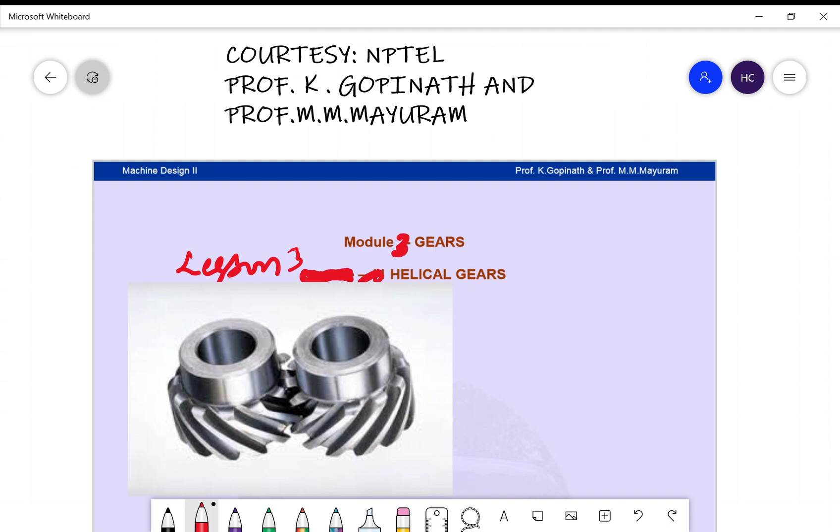Here we have an image of helical gears. Helical gears are used to transmit heavy power at high speeds with low noise.

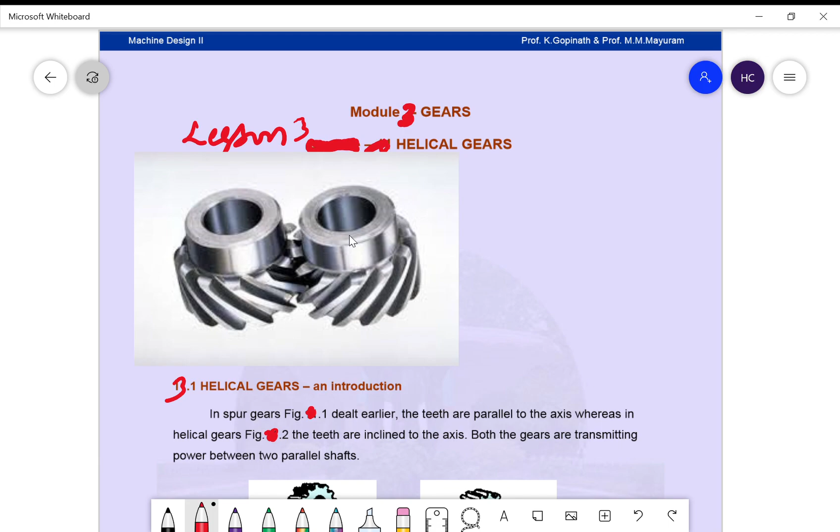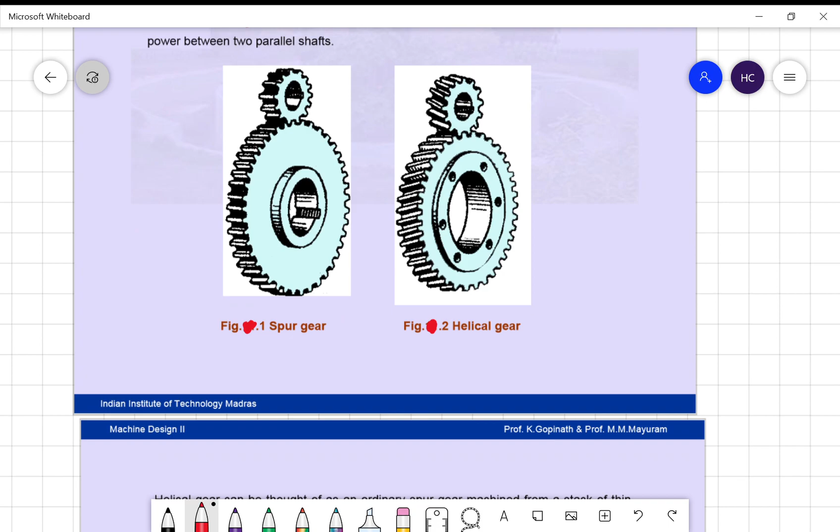Introduction. Here we have figure 1 and figure 2: figure 1 spur gears and figure 2 helical gears. We have already studied that in the case of spur gears, the teeth are parallel to the axis and also parallel to each other. Whereas in the case of helical gears, shown in figure 2, the teeth are inclined to the axis. That's the main difference between spur gears and helical gears.

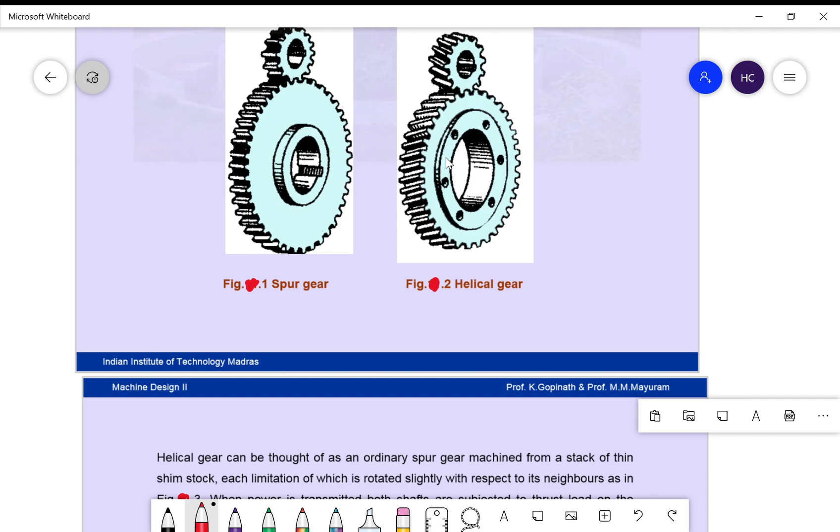Actually, a helical gear is a form of spur gear, but the teeth are inclined to the axis. A helical gear can be thought of as an ordinary spur gear machined from a stack of thin shim stock. Rotated spur gear laminations approach a helical gear as the laminations approach zero thickness.

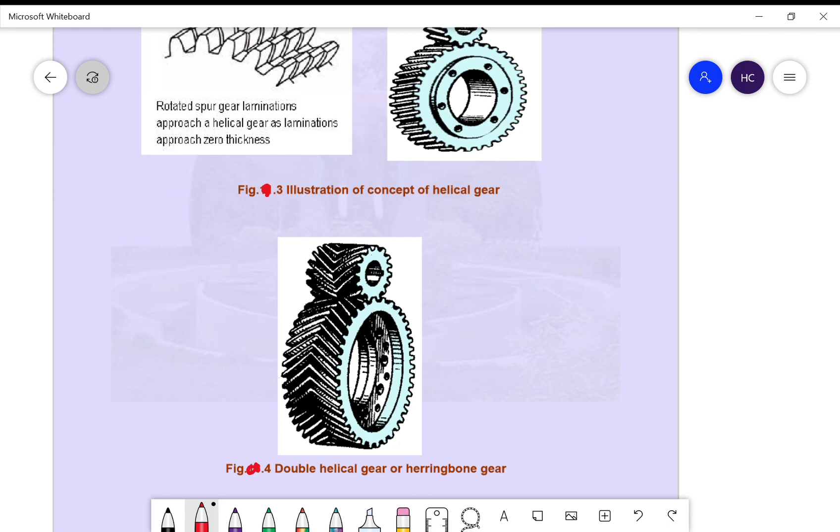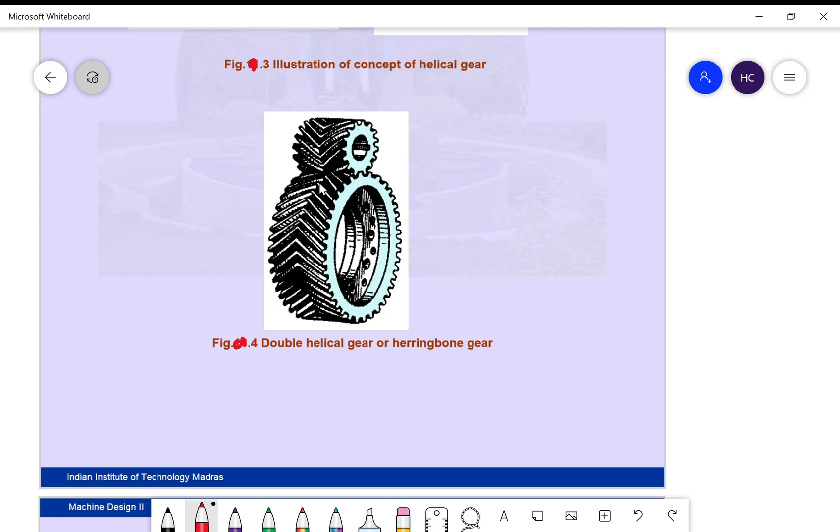Figure 4 illustrates a double helical gear, or herringbone gear. The herringbone or double helical gear, shown in figure 4 and also figure 5, can be two helical gears with opposing helix angle stacked together. As a result, two opposing thrust loads cancel and the shafts are not acted upon by any thrust load.

The advantage of elimination of thrust load in herringbone gears is heavy power transmission. But these double helical gears or herringbone gears cost high because machining cost and mounting costs are also high. Hence, application is limited to only very heavy power transmission.

Professor V.B. Bhandari distinguished herringbone and double helical gear. In the case of a herringbone gear, the teeth are cut on a single blank, whereas in the case of double helical gears, there will be a groove between these two gears. This groove separates the two gears in the case of double helical gear. But most engineers say that double helical gear is a herringbone gear.

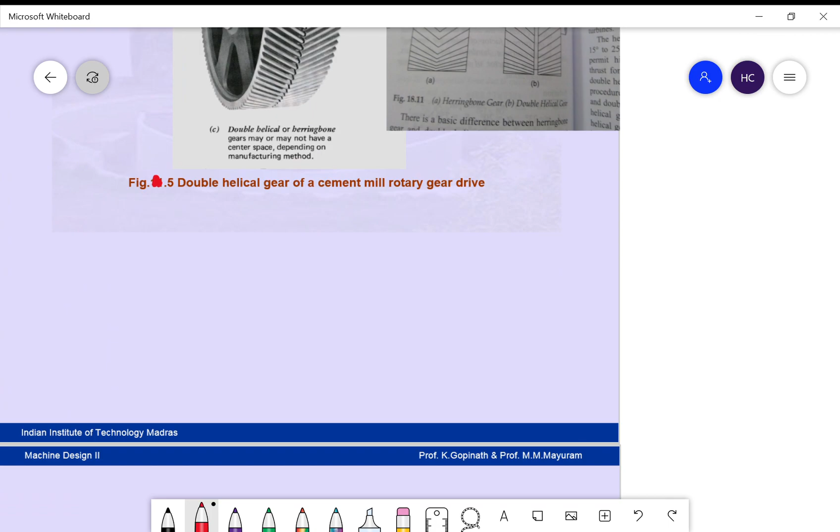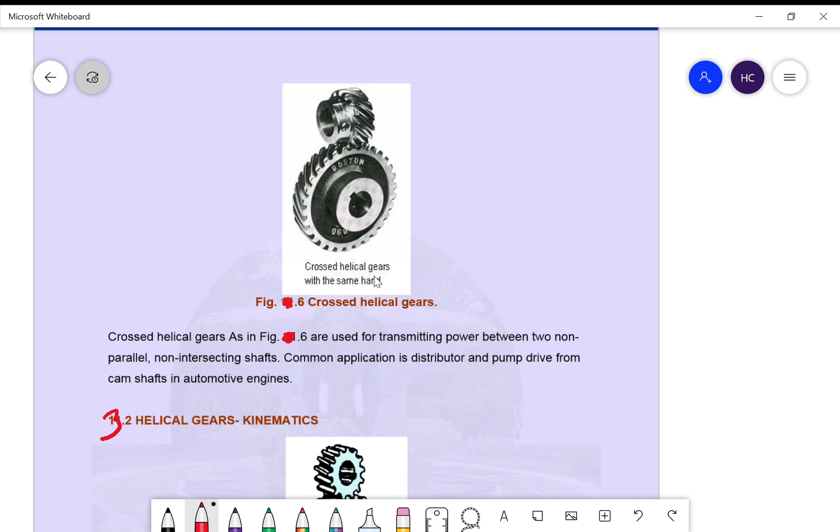Another class of helical gears is the crossed helical gear, shown here. Crossed helical gears are used for transmitting power between two non-parallel, non-intersecting shafts. A common application is a distributor and pump drive from camshafts in automotive engines.

Next we have helical gear kinematics. When two helical gears are engaged, as in figure 7, the helix angle has to be the same on each gear, but one gear has a right hand helix and the other a left hand helix.

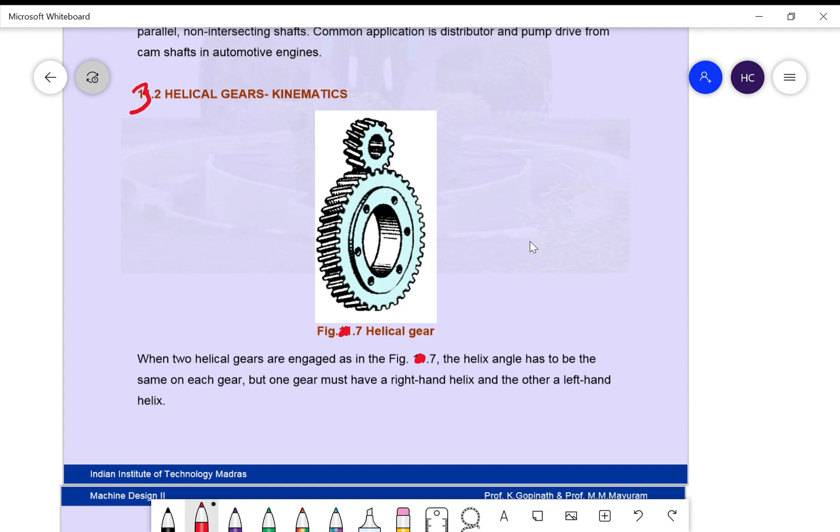Figure 8 illustrates helical gear tooth formation. The shape of the tooth is an involute helicoid, as illustrated in figure 8. If a piece of paper shaped like a parallelogram is wrapped around a cylinder, the angular edge of the paper becomes the helix. This is the edge of the paper, and this is the helix. The angle between this edge of the paper and the axis of the cylinder is called the helix angle, denoted by beta.

In these notes, authored by Professor Gopinath and Professor Mayuram, they have used xi to denote helix angle. But in the Design Data Handbook, 4th edition, authored by Professor K. Mahadevan and Professor K. Balaveera Reddy, they have denoted helix angle by beta. That's why I have changed xi to beta.

If the paper is unwound, each point on the angular edge generates an involute curve, as shown here. The surface obtained when every point on the edge generates an involute is called an involute helicoid.

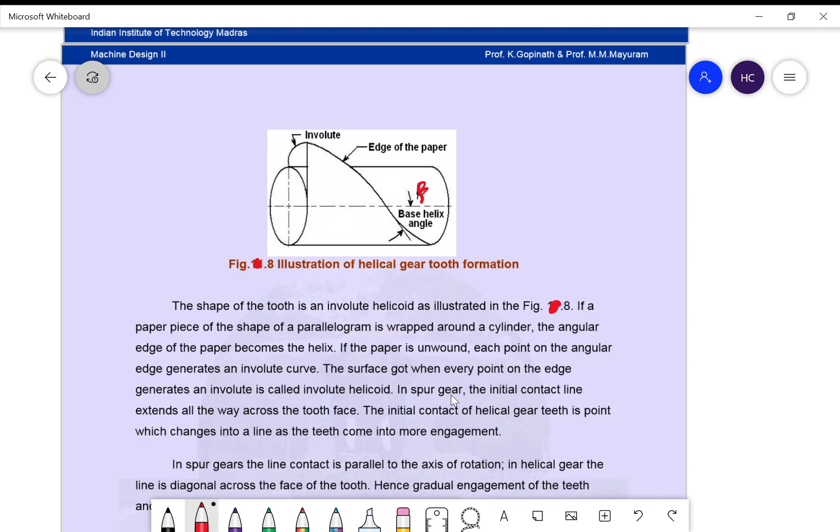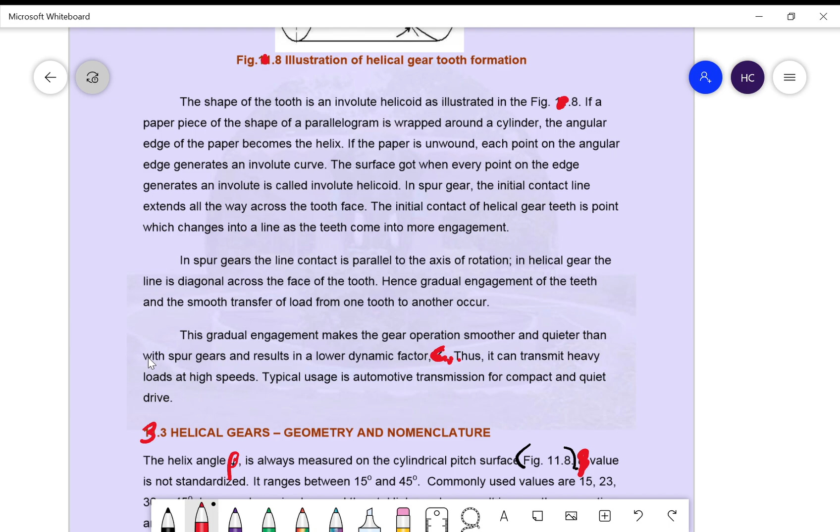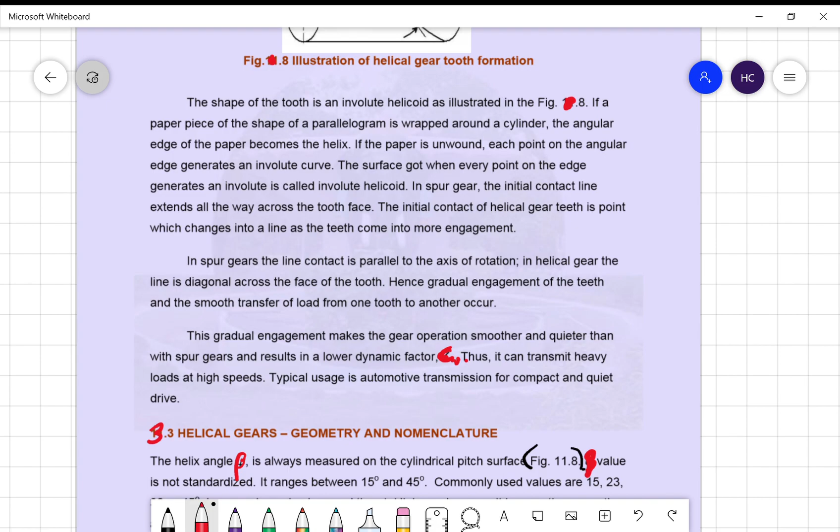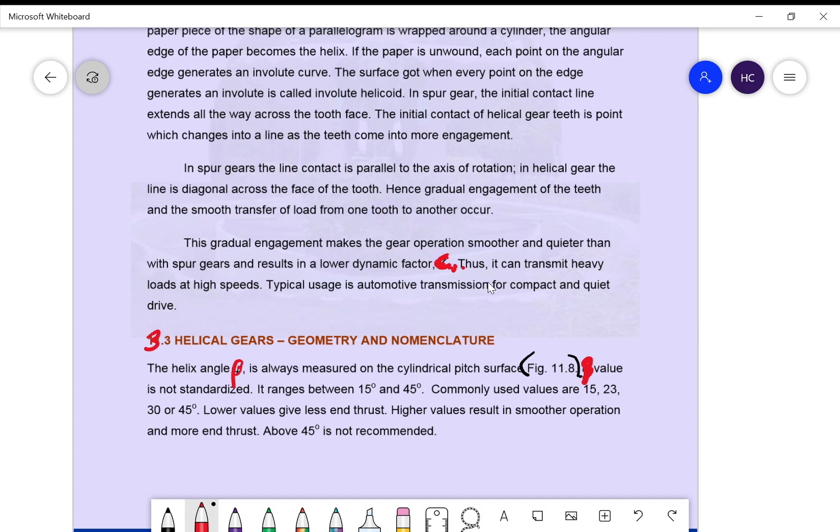Because of the helix angle, gradual engagement of the teeth takes place in the case of helical gears. This gradual engagement makes the gear operation smoother and quieter than with spur gears, and results in a lower dynamic factor CV. Thus it can transmit heavy loads at high speeds. A typical usage is automotive transmission for compact and quiet drive.

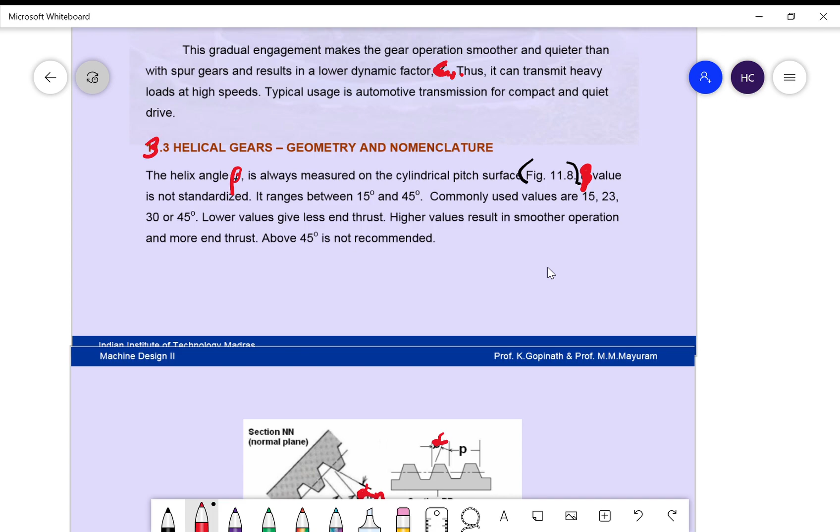Next we have geometry and nomenclature. The helix angle beta is always measured on the cylindrical pitch surface, here.

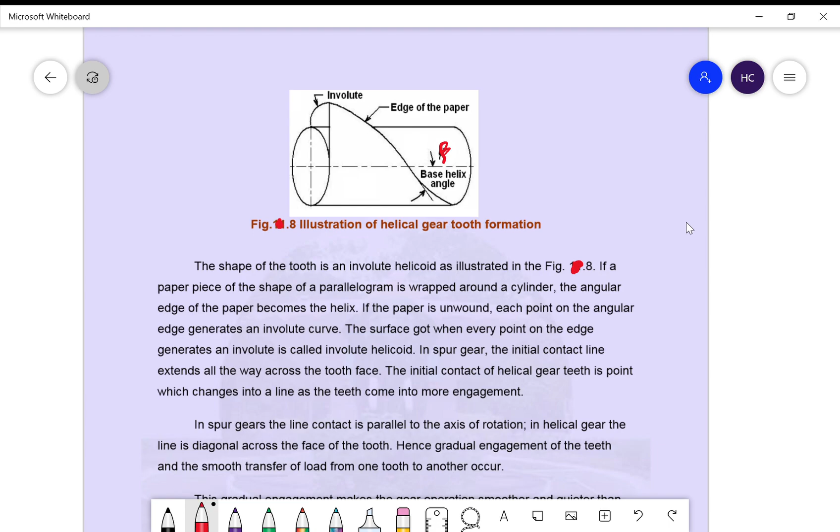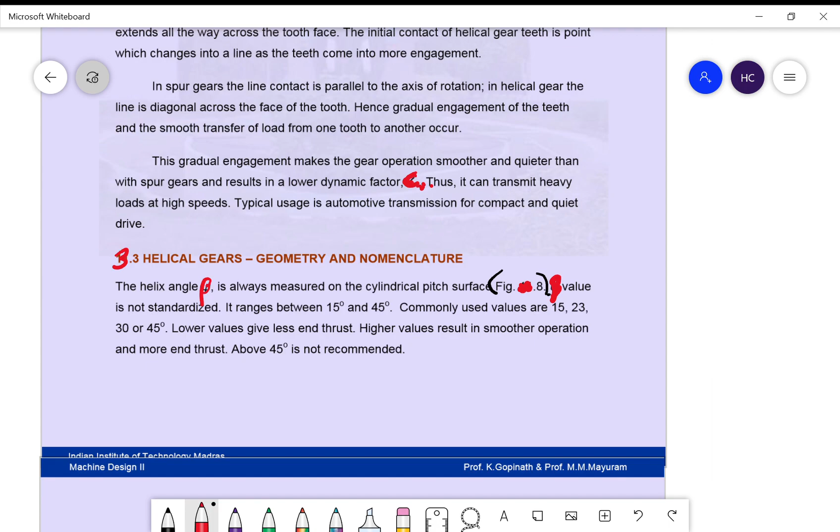Beta value is not standardized. It ranges between 15 degree and 45 degree. Commonly used values are 15 degree, 23 degree, 30 degree or 45 degree. Lower values give less end thrust. Higher values result in a smoother operation and more end thrust. Above 45 degree is not recommended.

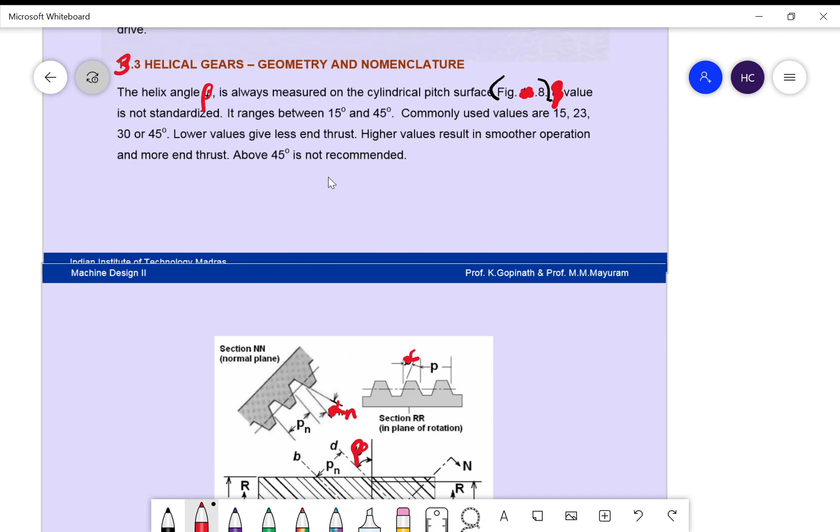Figure 9 shows a portion of helical rack. You can see here, these are teeth and this is the face width. And here we have two sections: one is normal plane, the other one is in plane of rotation, that is RR is in plane of rotation and NN is a normal plane.

Pitch in the normal plane is denoted by Pn and the pressure angle is alpha n. Pitch in plane of rotation is denoted by P. It is also called transverse pitch or circular pitch and pressure angle is alpha. Here we have axial pitch PA. This is circular pitch.

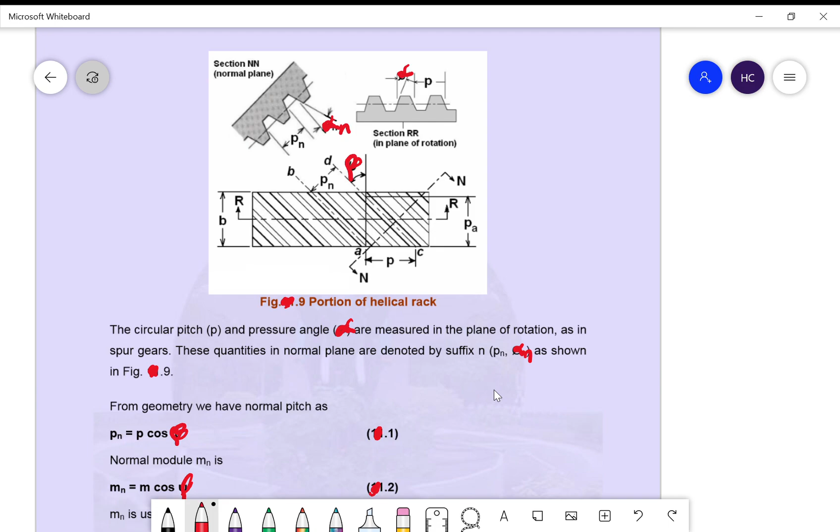The circular pitch P and pressure angle alpha are measured in the plane of rotation as in spur gears. These quantities in normal plane are denoted by suffix n, that is Pn normal pitch, alpha n normal pressure angle. From geometry we have normal pitch Pn is equal to P cos beta and normal module Mn is equal to M cos beta.

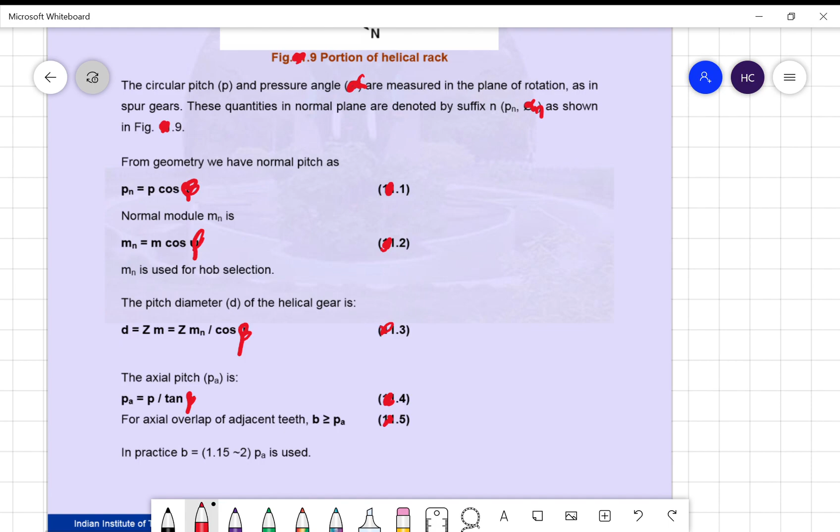So while selecting standard module, we need to consider Mn only.

The pitch diameter D of the helical gear is given by D is equal to Z into Mn by cos beta. D is equal to Zm is for spur gears.

The axial pitch PA is given by PA is equal to P divided by tan beta. For axial overlap of adjacent teeth, face width B must be greater than or equal to axial pitch PA. In practice, face width B is equal to 1.15 to approximately 2 times the axial pitch.

The relation between normal and transverse pressure angles: tan alpha n is equal to tan alpha into cos beta. Alpha n is the normal pressure angle, alpha is the transverse pressure angle, and beta is the helix angle. Please do remember this relation.

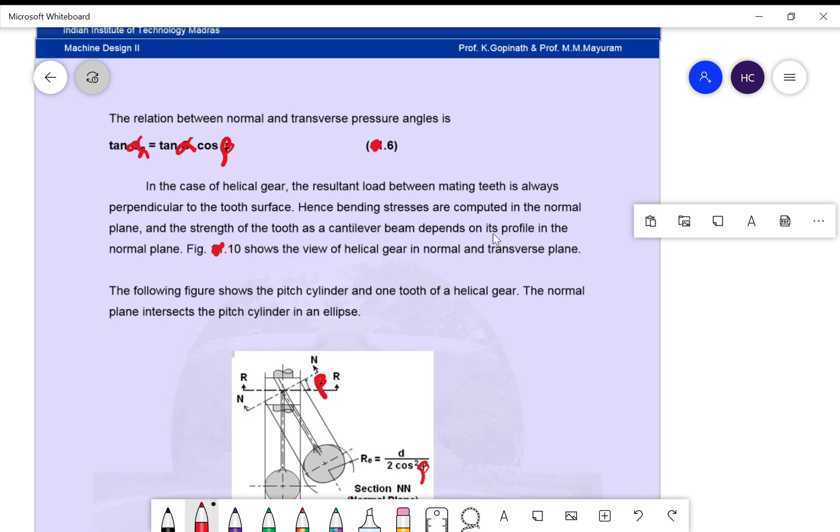In the case of helical gear, the resultant load between mating teeth is always perpendicular to the tooth surface. Hence, bending stresses are computed in the normal plane, and the strength of the tooth as a cantilever beam depends on its profile in the normal plane.

Figure 10 shows the view of a helical gear in normal and transverse plane. This is figure 10. The following figure shows the pitch cylinder and one tooth of a helical gear. The normal plane intersects the pitch cylinder in an ellipse.

So here this is the pitch cylinder and we have two section planes. One is in plane of rotation, the other one is a normal plane. So this is an ellipse. Here they have considered one tooth, this one. See here?

The shape of the tooth in the normal plane is nearly the same as the shape of a spur gear tooth having a pitch radius equal to radius RE of the ellipse. Here RE is equal to D divided by 2 times cos square beta.

In the case of spur gears, you know that radius R is equal to D by 2, where D is the pitch diameter. But in the case of helical gear, that radius RE is equal to D divided by 2 cos square beta.

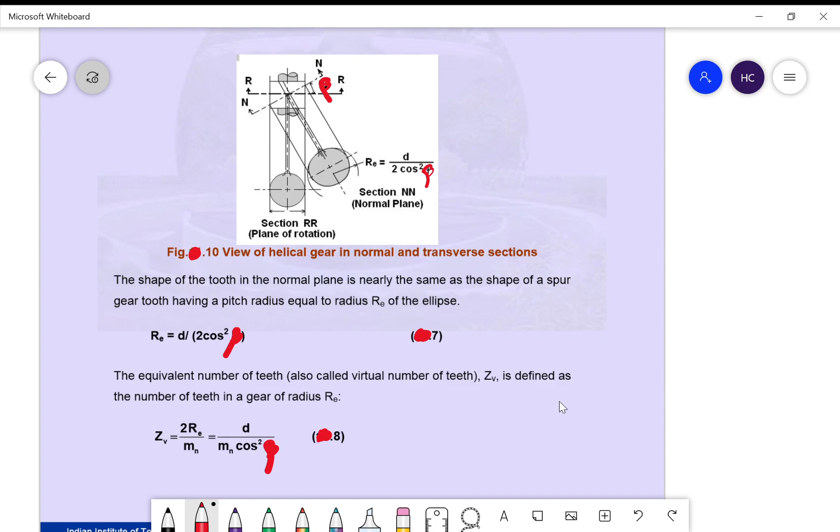The equivalent number of teeth, also called virtual number of teeth ZV, is an important parameter in the design of helical gears. This ZV, also called formative number of teeth, is defined as the number of teeth in a gear of radius RE. That is ZV is equal to 2 times RE by Mn, which equals D divided by Mn into cos square beta. They have substituted this value of R here in this one.

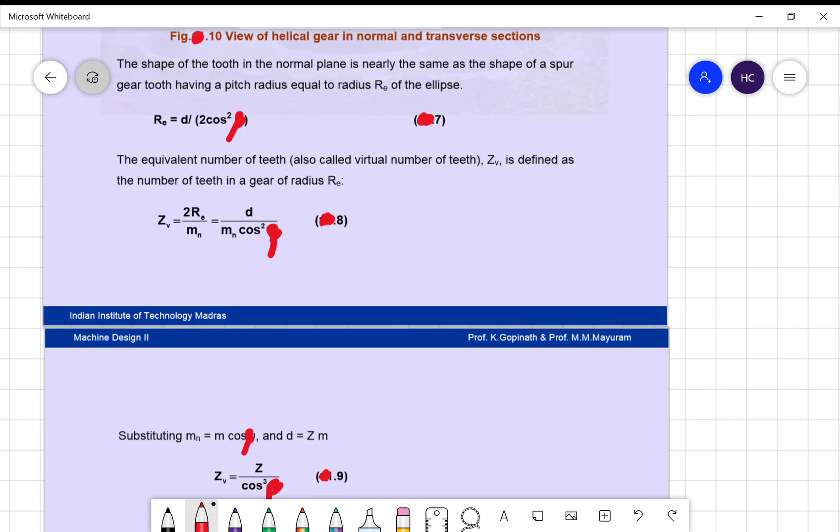So we have obtained this. Substituting Mn is equal to M cos beta and D is equal to Zm, we get the virtual number of teeth ZV is equal to Z divided by cos cube beta.

The design procedure for helical gear is almost similar to the design procedure of spur gears. But instead of using Z, we have to use ZV, the virtual number of teeth. When we compute the bending strength of helical teeth, values of the Lewis form factor Y are the same as for spur gears having the same number of teeth as the virtual number of teeth ZV in the helical gear and a pressure angle equal to alpha n.